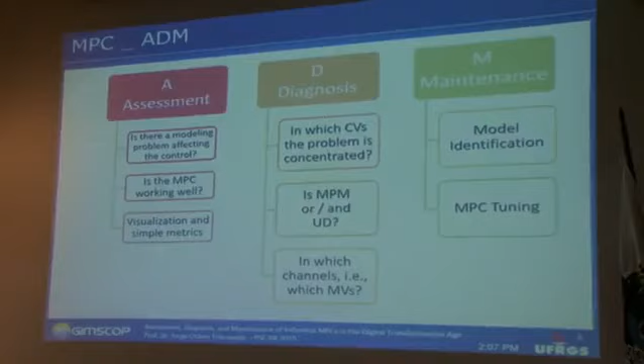Thank you very much, it's a pleasure to be here. What I will share with you is the result of our research. This research started in 2002 in collaboration with Petrobras. At that time, Petrobras started a collaboration with us, with Professor Gemiro, related to assessment, diagnosis, and maintenance. And what we will see in this presentation is how we solved this problem.

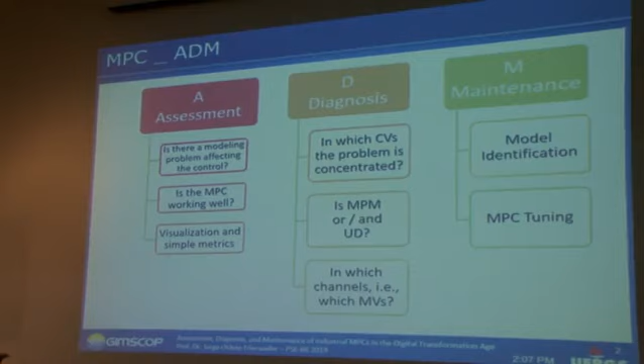It's a very complex problem because we are working with industrial MPC. The first thing we learned is how an industrial MPC differs from the academic world's MPC. That's the first thing we will consider. After that, we'll see how we can account for all these aspects and how we solved it from an industrial perspective, combining the industrial point of view with basic theoretical theorems.

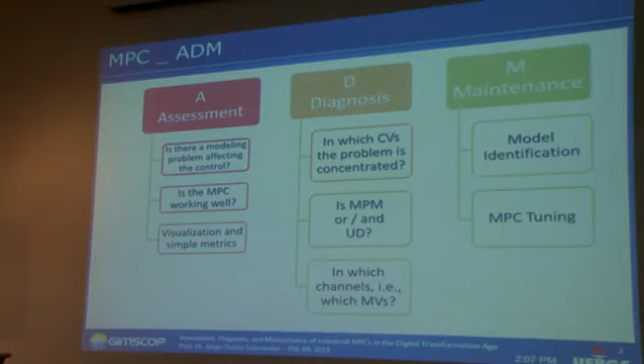Let us start. Here is the overview of my presentation. We can see all the slides, and I will speed up toward the end because I won't have time to cover everything. But I will start with the first thing.

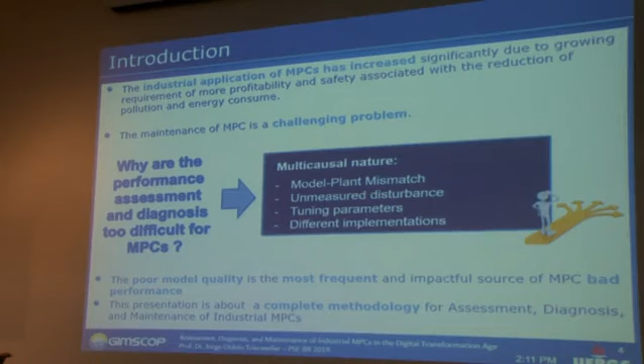The first thing is related to the problem, and it's very important to know that it's a very challenging problem. Why is it so challenging? Because it depends on the model, and all models have model-plant mismatch. We need to quantify this model-plant mismatch and how it affects our results.

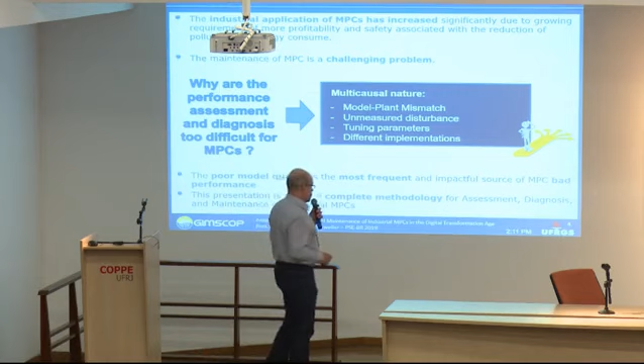Another very important issue related to this topic is that it's common to have unmeasured disturbance - that's another very important issue. And another interesting and important point is tuning parameters, because we have different implementations of industrial MPCs.

For instance, when we think about Petrobras, they have 3 different model predictive controllers. So we are looking for a methodology that is able to work with all these different model predictive controllers and solve the problem without specifying in detail a particular MPC controller.

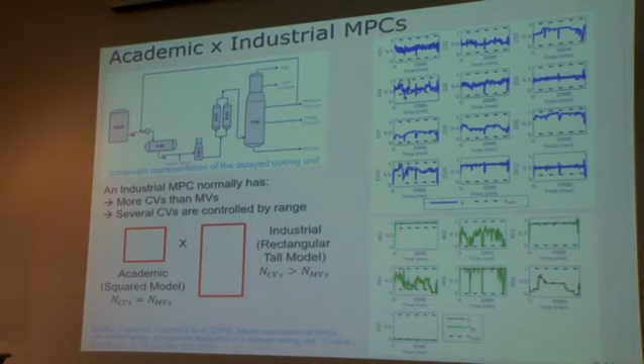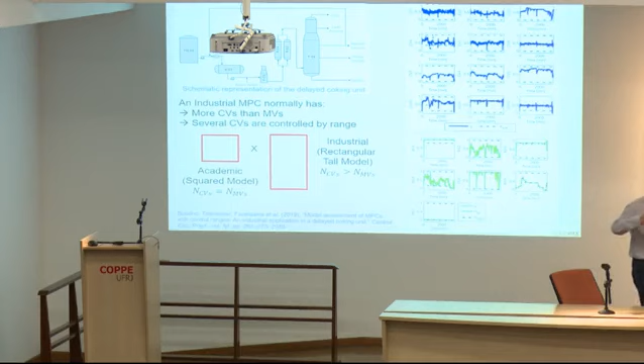But let's go further. The first thing we learned working with Petrobras is that in the academic world, we usually have square systems. In Petrobras and industrial MPC, usually we have more controlled variables than manipulated variables - the system is rectangular. This makes a big difference, because we should not work with set points as in square systems; we need to work with a multivariable system which is time variant.

Usually this time-variant system is quite difficult because we need to consider different scenarios, as we will see. Here we can see the academic world, which is oriented toward set points, in comparison to the industrial world, where we have soft constraints.

And here I introduce you to the first concept. Usually when we work with industrial controllers, we should not just think about set points. Yes, we have set points, but we also have what we call variables controlled by range. In this case, we call it fat points - in fact, we have a large area where the variable can be.

When the variable is inside this range, it's like satisfying a set point. And sometimes this range is small, but it can also be large. This is a quite different point relative to the industrial perspective, and we need to consider how we can handle this.

Another very important issue is that usually when we work with industrial MPCs, we have an economic layer. This economic layer usually changes the set points, the targets, the fat points for the MPC. So we always have a system that is changing the operating conditions and scenarios, meaning which constraints are actually active changes.

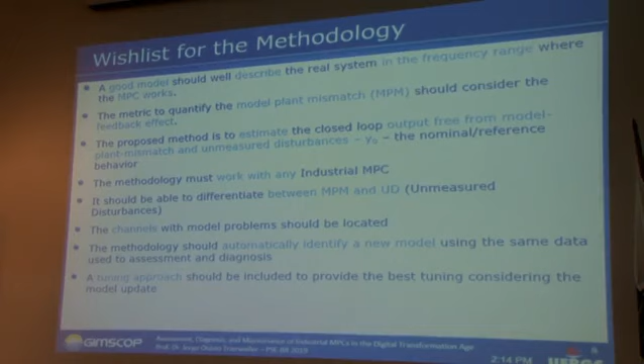Let's go further. Our wish list at the beginning of our research was this: we should have a system or procedure that considers exactly the frequency range where our controller works, and then we should quantify this model-plant mismatch exactly in this feedback, considering this feedback effect. And I will show you that we have done this quite well with our approach.

And then, to capture these two things, we define what we call Y0. Y0 is our reference, our performance reference, and this performance reference can consider this.

And then we need to work with industrial MPCs. As I already mentioned, at Petrobras we have 3 different implementations, and we should work with all of them. And then we need to decide if we are having model plant mismatch or unmeasured disturbance.

After we identify if the problem is related to model or disturbance, we need to show or identify which channel has the problem. Because if you know which channel has a problem, you can identify it, which can considerably reduce the time to maintain and update the model.

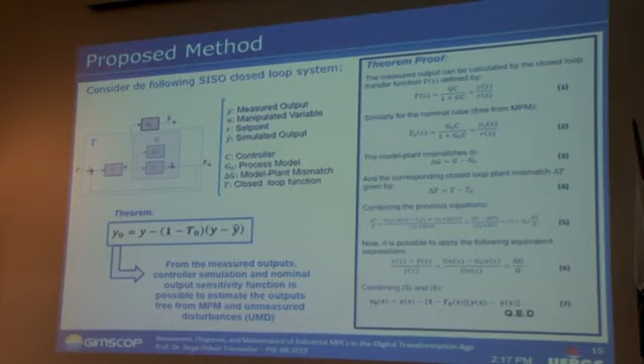And here we can go further and show you what is the base of our methodology. The base of our methodology is this theorem here. And what does this theorem give us? It allows us to calculate Y0.

Y0 is the output in the case where we would not have any kind of model plant mismatch and no disturbance. It is our reference. And for this reference we use the sensitivity of closed loop, and I will show you closely.

For developing this theorem, we consider an uncertainty model, and we have a model of the MPC called G0. Based on G0, we calculate the sensitivity matrix, and based on it, we are able to calculate Y0.

Let us understand better this Y0 and what it means. Here it's easier to understand. We have two models: G0 is the nominal one, and the magenta line corresponds to the real plant.

It's subject to a given input, and when we consider the prediction error of this model, we have this figure here. But the main point is that I can have a big difference between the models, but the models can work quite well in closed loop.

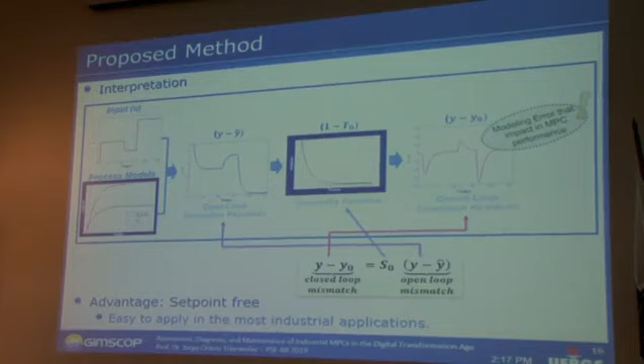One very important issue is that in closed loop, the impact of the error changes, and what changes this impact is the sensitivity function. Here we can analyze this graphic, and this is the main idea of this theorem.

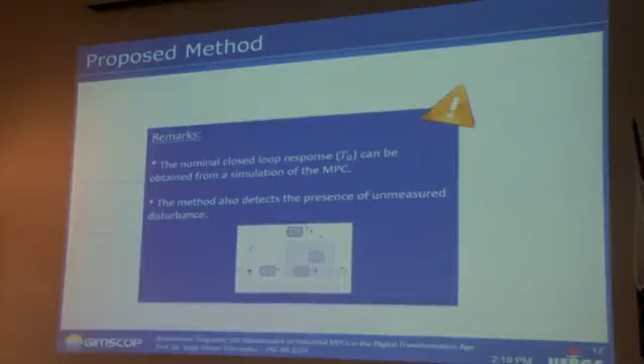Based on it, I will show you that we are able to develop several different points that solve all the problems that I have shown you before.

Another very important point you may ask me about: how can I get this T0, this closed loop response or the sensitivity closed loop response? For that, we use a simulation of the real MPC controller using the model used in the control.

And then we identify, and it's very simple to identify this S0 for each scenario that we can find in a real plant. In other words, we are able to convert any kind of MPC controller, and we can apply this methodology to any kind of predictive controller.

Another very important and related topic is the unmeasured disturbance. The unmeasured disturbance is also captured by this methodology, as we can see later on.

And here we see how we can quantify if the model is okay, if the system is working well, or if it's giving a poor result. A very simple way to do that is using the relative variance index, IVAR.

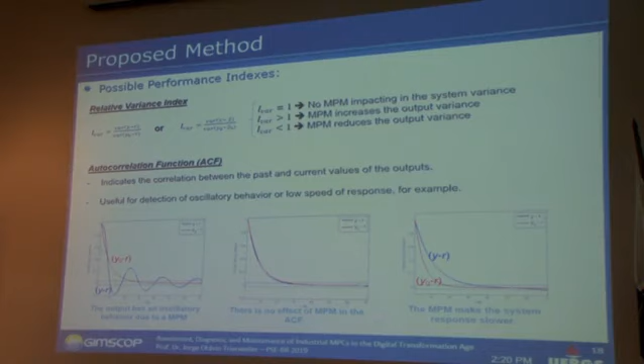The IVAR is the ratio of actual variance to our reference variance. If it's close to 1, it means the system is doing what I expect it should do. If it's higher than 1, it means the model plant mismatch or unmeasured disturbance increases the output variance, meaning we have a problem related to this controller.

And then if we have a value less than 1, it means that we have a model plant mismatch, but in this case, this model plant mismatch can help the system give a better performance than the original one.

Another way to see this kind of result is using the autocorrelation function. And here we can also analyze other behaviors like

oscillatory behaviors and so on. Then we have two approaches to quantify how good the system is related to this topic. It's a very interesting thing because it can apply in different systems with different controllers in different scenarios.

Then let's go further. Here's the main idea of how we calculate this. We start with process data. We need the set points and the measurement values.

And from the MPC controller, we have the control action, which is calculated by the MPC controller. We need to know the nominal model, the model used in MPC. And based on simulation, we can then identify the S0.

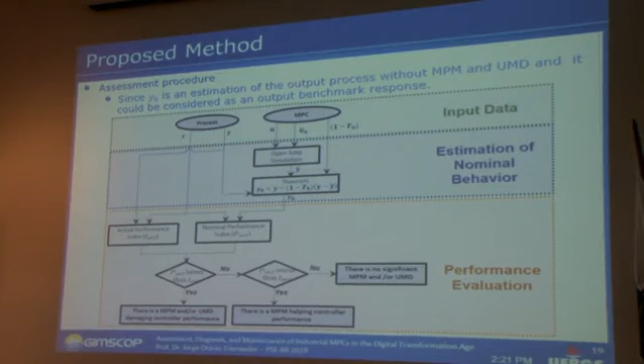For instance, at Petrobras we use BR Lumina to simulate the controllers used in industry. And then we automate this, and obtain the sensitivity or the complementary sensitivity function.

Based on the manipulated variables and the model, we do an open loop simulation, and then based on our theorem, we quantify the Y0, which is our reference. And then we can calculate the I-var and compare the results as I showed you before.

Then it's a simple technology which can work with different controllers. And here I show you in a simple example how it works. Here we have M1, the model used in MPC, the nominal model.

And the real plants are two different real plants. M2 is this one, the green one, and M3 is the red one. And then we have tuned two different controllers. One is faster. The closed loop sensitivity function of this is this one, and the other one is slower.

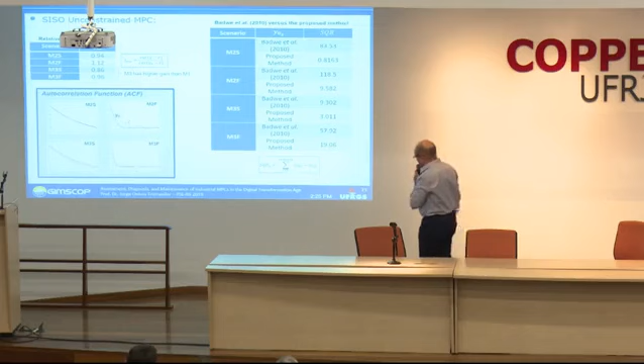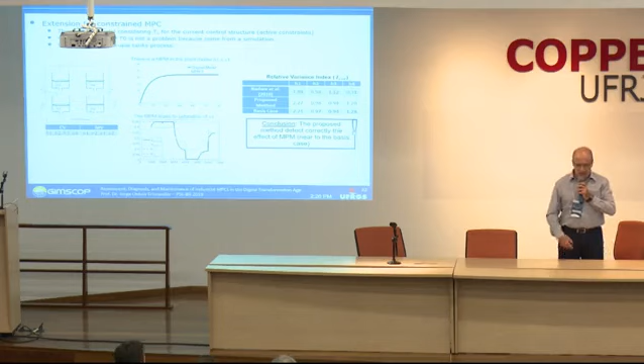Then let us speed up a little our presentation. We have also applied this for a multivariable case, and of course the results are similar, and these results are presented in this paper which we published in 2015.

And then let's go to the other topics that I have mentioned. I know now whether our model or our system is working well or not. If it's not working well, I want to know where the problem is and what kind of problem we have in our system. And then for that, we need to go to other steps.

And then we have here a case. We can see clearly that the result or the performance is very bad. But the problem is we can have a model plant mismatch in one channel. But if we have a system which is strongly interacted with each other, if we have a strong interaction, we

then should consider where is the location. And for that, instead of using a full version, which gives us this kind of results, we use a diagonal one, just the diagonal elements of

sensitivity matrix or the complementary sensitivity matrix. And this gives us which channel has the problem. Where is the problem? The problem in this case is related to this channel. This result is also published, and based on this result, we can then apply

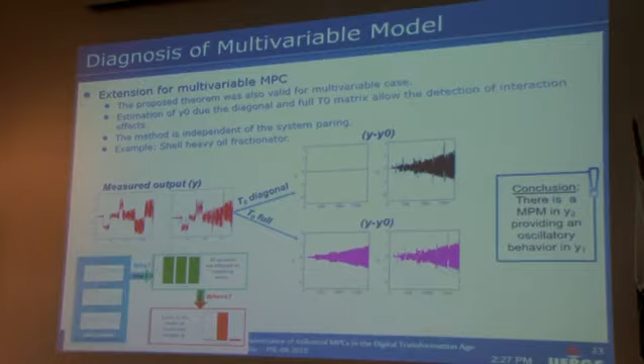I-var for the general system and for the diagonal one. And here we can clearly locate which output is related to the problem, where it's located, which output is strongly affected by model plant mismatch or disturbance. And this was published in 2016.

And now we need to decide if we have a model plant mismatch or unmeasured disturbance. For that, we use some correlations.

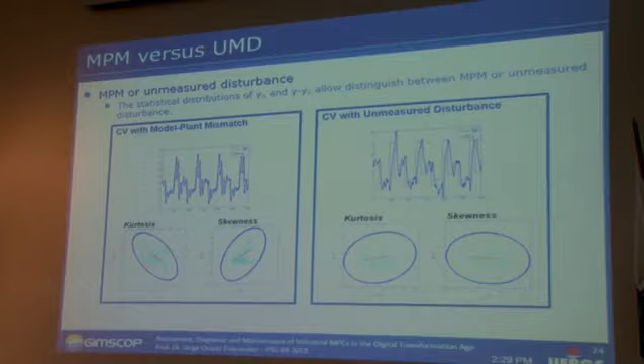Here we have two different systems. One is related to model plant mismatch, and another is working not well because we have unmeasured disturbance. Based on the skewness and kurtosis, we are able to quantify if we have a problem related to disturbance or to model plant mismatch.

If we have model plant mismatch, we have this kind of behavior here, a strong correlation between Y0 and E0. In the case where unmeasured disturbance occurs, we have no correlation like this. This was published in 2016 in this paper here.

Now we need to know which output is more affected by model plant mismatch or unmeasured disturbance. Now we need to know which are the manipulated variables related to it. This is our next step.

Here then, we will develop this kind of index, which is called the normalized model discrepancy index. And for this one, we do the following.

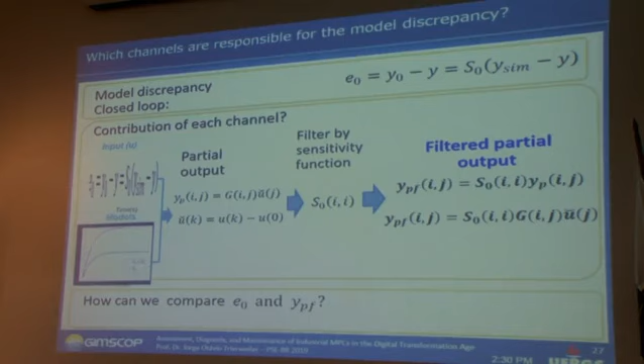Here we have the error, the input, and then the model. Based on this, we calculate the partial output. It means the output which is produced only by one variable each time. And then we filter it using the sensitivity function, giving us a filtered partial output for each manipulated variable.

Now we correlate E0 with this filtered version, and with a cross correlation, we are able to identify which manipulated variable is responsible for the model plant mismatch. Now we know exactly where the model problem is, and if the problem is related to the model.

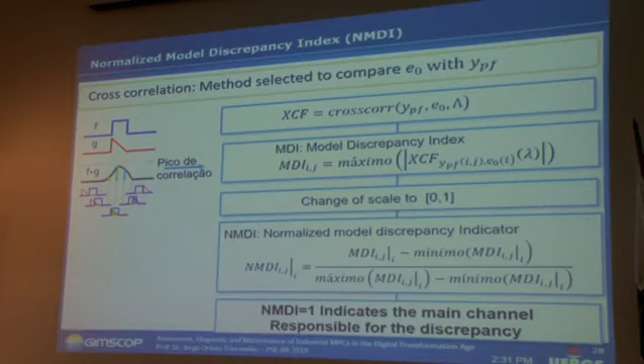The next step is model update. Before we do that, we applied this in a delayed coker unit. This is a real system, a plant in Refap. There we have 12 CVs, 7 MVs, and 2 disturbances.

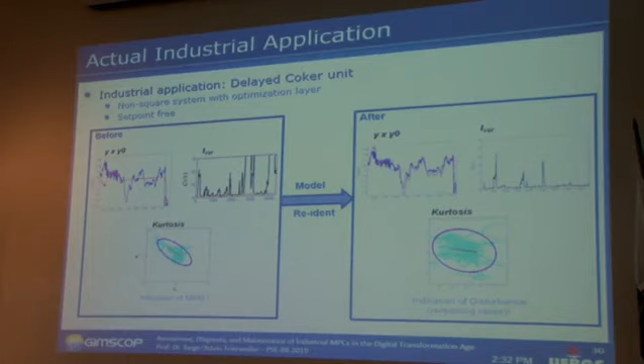Just to summarize, applying this methodology to this system, we found that channel CV11 is where we have a problem related to the model. Based on kurtosis, we see that the problem in this variable is because we have a model problem. And then we identified a new model.

After this identification of the new model, the result we got is this one, and now the problem is only related to unmeasured disturbance. This was applied in a real system and published in 2019, this year, in collaboration with Petrobras.

Now, I don't have too much time, but I will show you very fast how we can do model update. For the model update, we have also developed a new procedure. This procedure uses the same data used by the diagnosis, the same data we use to identify if we have a problem.

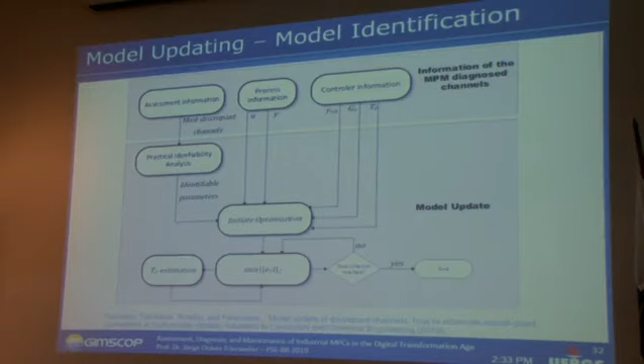In other words, we don't need to additionally perturb the plant. The data that we have is enough. We have a procedure based on it, and here we have developed a new closed loop identification using this approach. This gives us very good results, and it will be published soon.

Finally, after I have a good model, I can then update the tuning. And how can we do tuning on this system?

The tuning is based also on different scenarios, and this is something you can also apply in different types of controllers, not just MPC — you can use it also for a multivariable PID controller or something like that. The first thing is we need to decide which scenarios we want to work with, or need to work with.

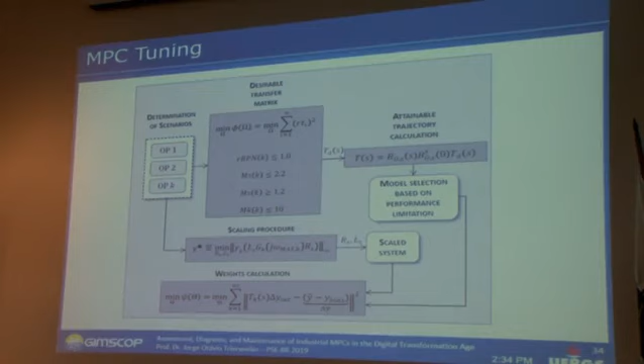Based on an optimization problem, we calculate the attainable performance for all these scenarios. When we know what we can achieve with the closed loop system, the best performance we can achieve, respecting the manipulated variables, robustness, and attainable performance, we have a reference model.

This reference model we can then apply in another optimization problem, where we can tune any kind of industrial MPC. This optimization problem is almost convex, which makes life much easier when we have a real attainable performance.

This last stage is a standard optimization using the desired performance or attainable performance, considering the model predictive controller that we intend to apply in a real plant. This tuning procedure has been published in 2 different papers.

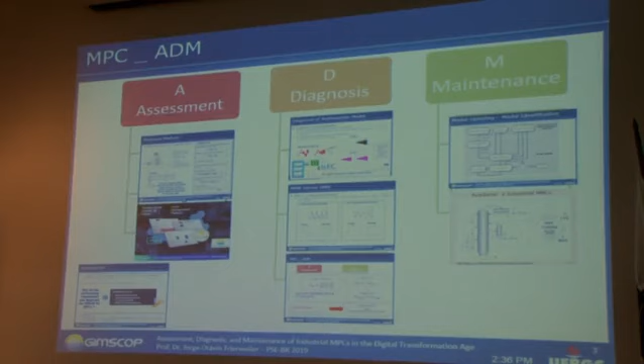Now Franzen is already there and wants me to finish my presentation, so just to complete my presentation, I will show you what we have implemented in a real environment.

This system is called Asset Management Platform, Plataforma de Gestão de Ativos, PGA. It was developed together with Petrobras 3 Solutions and is currently being tested in Petrobras. We already received an award from ANP.

In this system, the idea is to produce or quantify predictive maintenance, flexibility, and other things. Related to the topic we discussed, we have developed a toolkit called MPC-ADM.

The MPC-ADM applies this kind of methodology that I shortly presented to you. We have also developed a nice interface where we can locate and have a previous diagnosis of problems in the system. And then we have also other graphics in this system, and based on it we are able to apply the methodology that we have developed.

To conclude my talk, after a long time, we started more or less in 2002, and we have finally completed our wish list. Now we are prepared to go to the next step.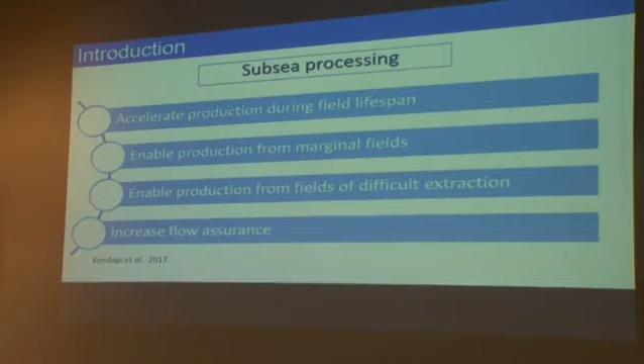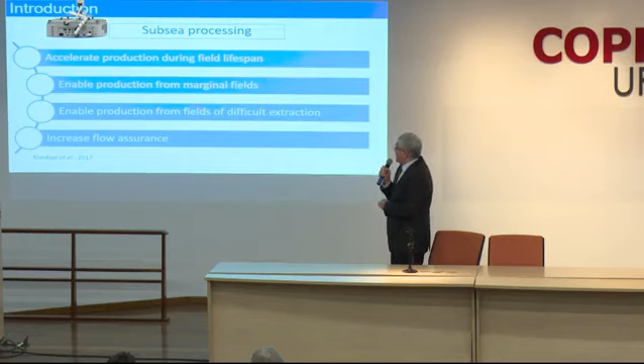This work is about subsea processing. By subsea processing, we refer to treatments applied to fluids at the seabed or below it. The objective is to raise the recovery factor of the reservoir. For example, you can use gas compression, which is the subject of this work, for that purpose. This brings many benefits: you can accelerate production during the field lifespan, apply it to mature brown fields, use it for marginal or smaller fields, fields that are difficult to extract from, and also increase flow assurance.

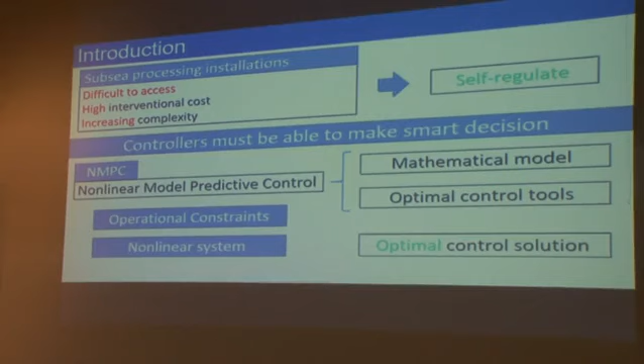However, we have some difficulties related to these processes. For example, they are becoming complex in order to attend to all these benefits, and since they are located under the sea, they are difficult to access and far from the coast. This difficulty in access makes maintenance difficult and very expensive. So it would be nice if these processes were able to self-regulate, and the controllers should be able to make smart decisions.

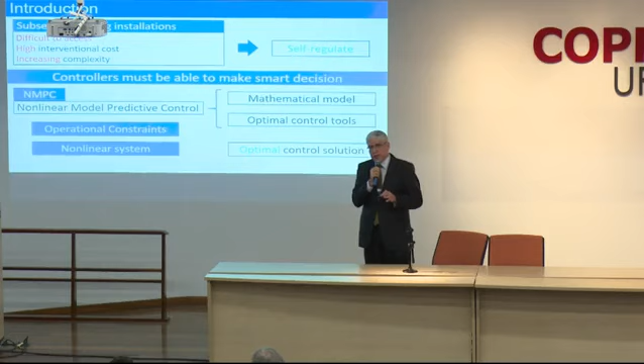We are exploring nonlinear model predictive controllers for controlling these processes. Nonlinear model predictive control, which is very related to the previous presentation's nonlinear version, uses mathematical models that are nonlinear. We will also consider operational constraints and try to find optimal control solutions.

Besides those difficulties that I mentioned, there are some challenges that we have to deal with. Because the environment under the sea is very harsh, the conditions of deep oceans are very difficult to work with. So we have a lot of uncertainties of different kinds.

For example, we have unknown disturbances. The parameters were estimated based on scarce data. We have structural uncertainty due to the fact that we use simplified models. And the sensors may be noisy, or we may have lack of sensors. So we have to proceed with optimization under uncertainty.

We'll treat one specific case. This is a subsea gas compression system named Åsgard. It's in Norway, in the continental shelf of Norway. It was the first subsea compression system implemented about 4 years ago.

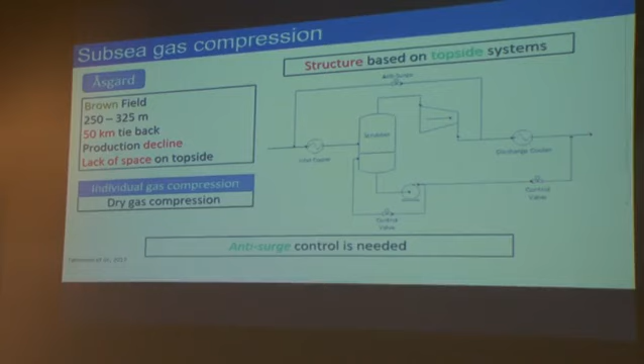And so, for example, they had anti-surge control. You have here the anti-surge valve. So this is the case that we are going to study.

We are concerned with the surge phenomena. We have these typical curves of pressure ratio versus volumetric flow. We have regions where we have surge, which causes instability, even the breakage of the compressor. So we must work away from that zone, but not very far, because the efficiency is higher near there.

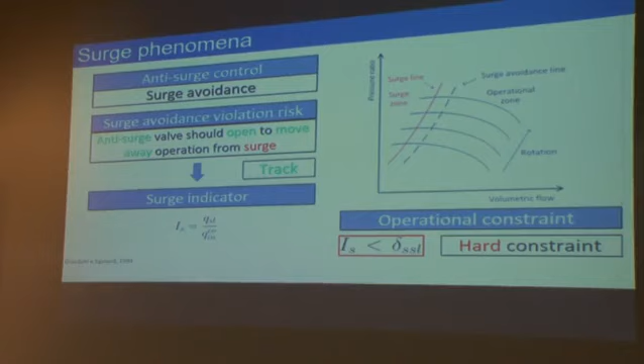So we include a surge avoidance line and an indicator, which is a ratio between the flow in the surge line and at the entrance of the compressor, and we establish a hard constraint for this indicator. So the objective is to study the closed loop for this process of subsea compression, avoiding surge in the presence of uncertainties.

The first thing that we had to do was to develop a model, a phenomenological model. You see here the components. In order to make it easier to identify, we have put in green the equipment where we are manipulating the variables, which are the heat removed and the opening of the valves.

We have 2 trains here, and also the rotation in the compressor. And the dynamic states that we are evaluating are pressure and temperature in the scrubbers and in the header.

That was implemented using IDAS, and we will see that the optimization problem was solved using CasADi.

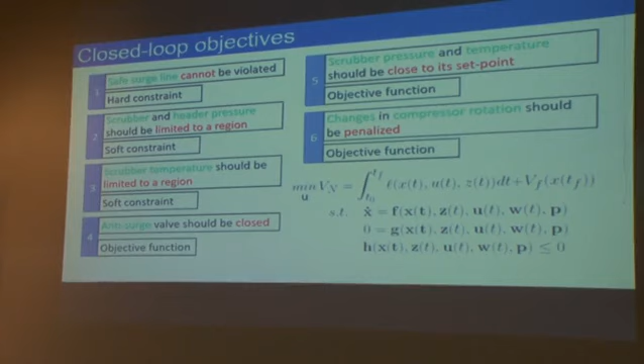So the closed loop objective — we had in fact many objectives that we listed in priority here. The first objective, which was a hard constraint, was to avoid surge. Then we had soft constraints on the scrubber temperature and pressure.

The anti-surge valve should work closed during normal operation. We wanted to follow set points for the scrubber pressure and temperature, and also changes in compressor rotation should be penalized. So this is the objective function here, subjected to the constraints. We developed the terms of this finite cost function so that all these considerations would be taken into account.

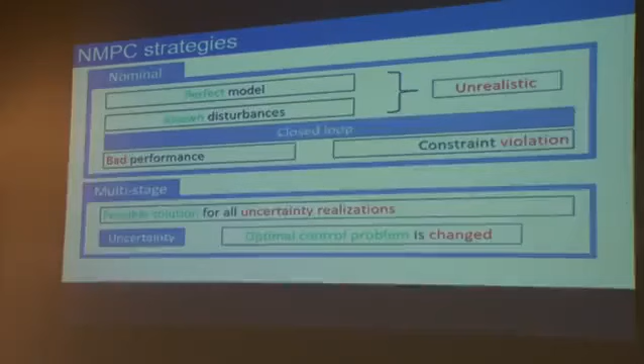But we had also two other conditions here. We could use a nominal approach in which the model of the process would be known along with the disturbances, but that would be very unrealistic. And if we closed the loop in the presence of uncertainties, there would be problems like constraint violation or bad performance. So we used a robust approach, named multi-stage approach, in which we calculated a feasible solution for all realizations of the uncertainties, considering that explicitly in the solution of the problem.

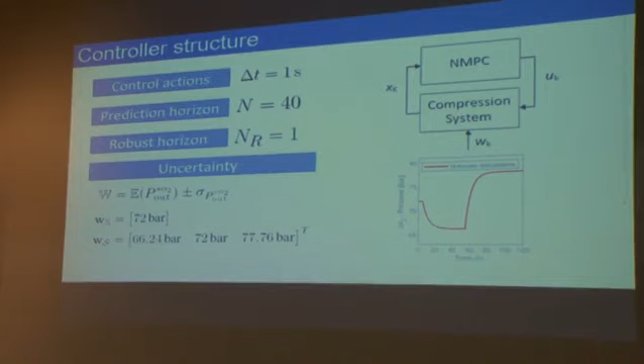It was to simplify things. For the uncertainty, we considered that the pressure at the input of the second train could vary between these 3 values, with an expected value and a standard deviation. So the multi-stage model considered these 3 realizations, and then we made a simulation in which the disturbance variable varied like this.

I will only show some results here because, due to time constraints, I had to select some of them. I will not show the first trial and other tests we made, like set point tracking. I will only show the results for that disturbance.

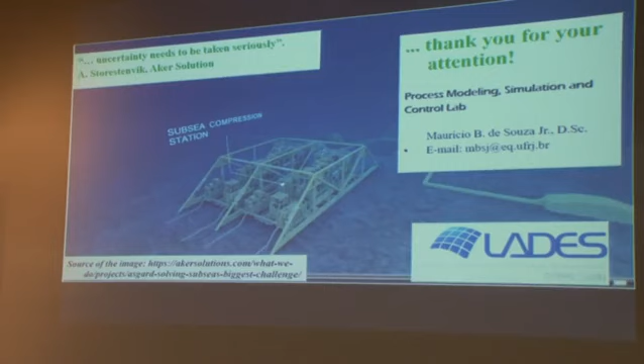So the final message is this phrase I chose from Aker Solution. Aker Solution was the company that helped Equinor install this equipment. An engineer there said uncertainty needs to be taken seriously in every project for the process to be operated safely. That's the main message I would also like to pass on.

Here you have my address, and thank you for your attention.

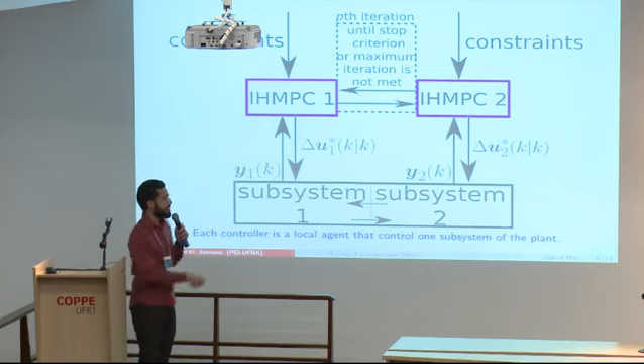Talking about the cooperative distributed controller, we have a certain number of agents, represented here as infinite horizon model predictive controllers, controlling some subsystems of a major system. They are presented with the same color because they share the same objective function. The difference between them is actually the decision variables. Each one has a certain subset of decision variables, which reduces the size of the problem each one is solving, making them faster than possibly a centralized controller. However, they exchange information with a distributed suboptimal optimization algorithm that can be terminated at any iteration time.

So the formulation of each agent in this controller, in this proposition, is actually an infinite horizon model predictive controller with terminal constraints, which are not here represented because they were already substituted directly into the optimization problem.

Then the main idea is that each output variable should track what we call the artificial state, and this artificial state is actually the set point that it might be tracking.

The advantage of this strategy is that by not posing hard constraints, these controllers always find a solution at any time step. So this is an advantage, and the feature is feasibility. Given any solution, it remains feasible at successive time steps.

It converges to the centralized solution if enough time is given for the suboptimal algorithm. And optimality: if this algorithm is terminated at a certain iteration, let's say P, it will converge to a Pareto optimum. And the stability of the formulation, that the closed loop remains stable, means that the cost function of each agent is a Lyapunov function in the nominal case.

But optimality and stability depend on defining minimal values for the elements of the suppression matrix. If this property is satisfied, the controllers are stable.

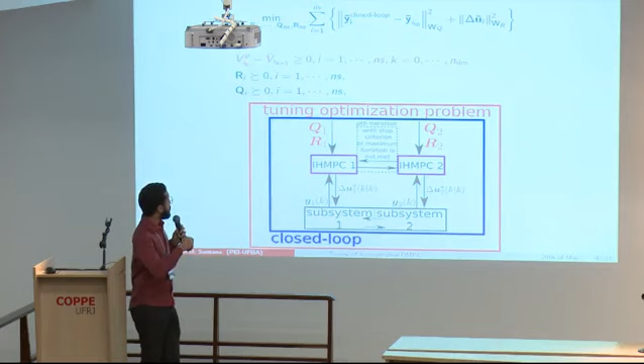So we define a tuning algorithm to track the difference between the closed loop simulation and the set point, penalizing variations of the input variables, and it needs to satisfy this restriction, this stability constraint that we imposed.

So, in offline systems, we simulate a closed loop with a certain matrix given by the auto-tuning optimization algorithm. This will find the best trade-off between performance and stability.

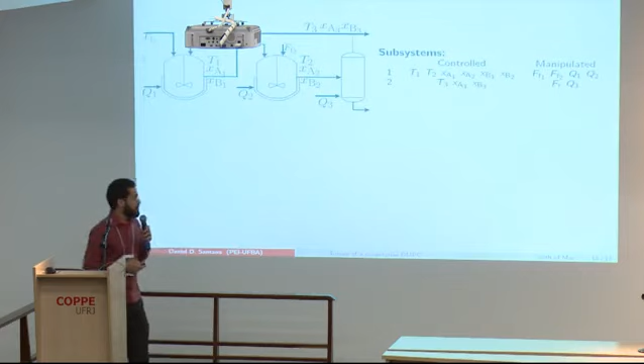Then, to highlight the features of these controllers, we used two CSTRs in series with a flash tank with a recycle stream that was used back in 2010 by Stewart.

We choose two subsystems to work with: the CSTR reactors and the flash tank. And to impose a harsh scenario for the controllers, we set the control horizon of both controllers to one, to reduce the amount of information exchange between the controllers, and the maximum iterations of the distributed optimization to one, to be very fast to solve as well.

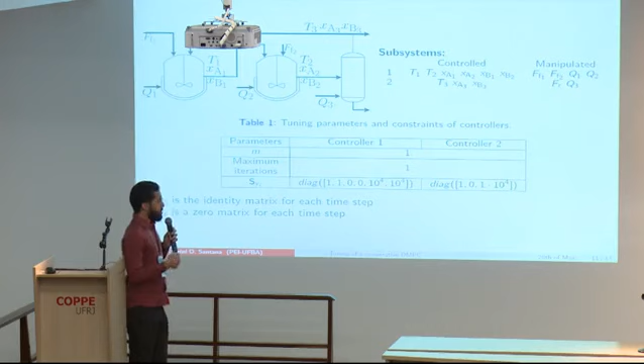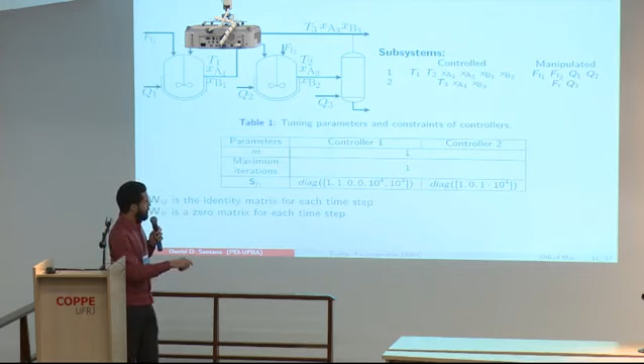Since we are using a tracking problem, not a zoning approach, and this problem is not square, we set the composition of the reactant A to be in open loop for this example, and we want to control the composition of the product B. That's why we set this matrix as high as possible, and we also want to track the temperature, but with lower weight.

So these are the results. The values found were not impeditive for the application.

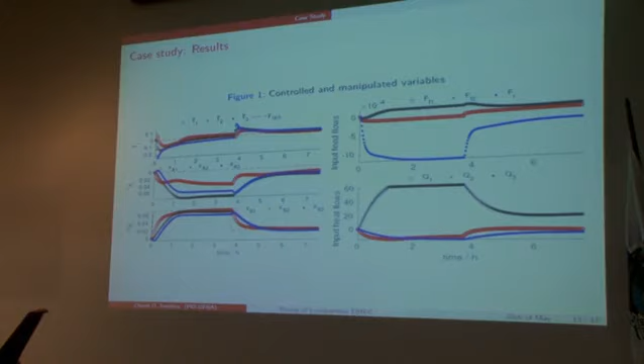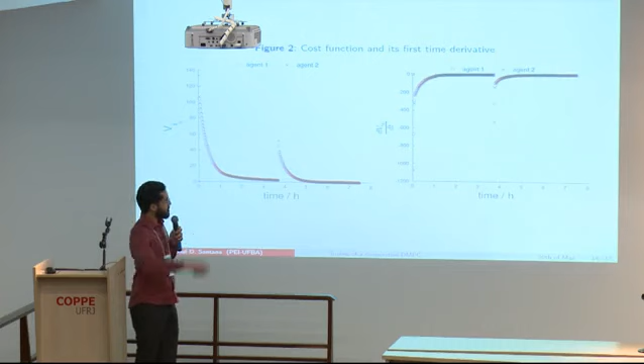Let's compare it here. Here we have the composition of the product tracking the set point, the temperature tracking the set point, and the cost functions of both agents acting as a Lyapunov function, monotonically decreasing. Here we have the absolute values and the first time derivative of this function to prove that it does not increase. The only increase you find here is on the change of the set point.

So, some concluding remarks. We propose a tuning algorithm that can calculate the trade-off between stability and performance for this approach, and we successfully applied it in a simulated scenario using a system provided in the literature.

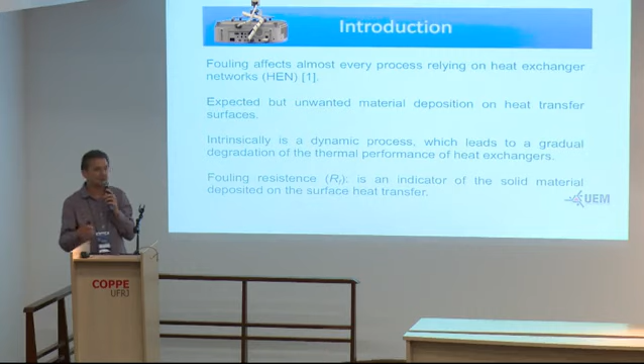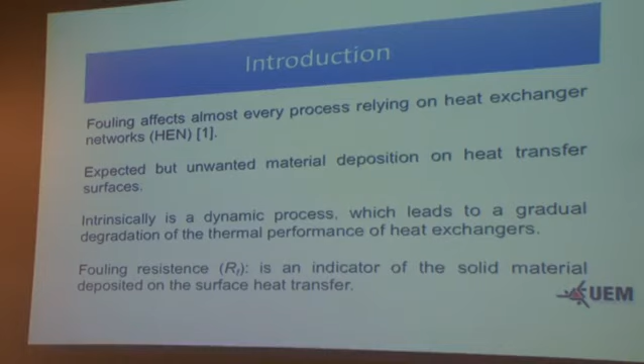Some authors use the term fouling resistance, but originally the first works treated the problem as a fouling factor, a number that is an indicator of the amount of solid material deposited on the heat transfer surface. But we know that it's not the correct way to treat the problem, because the first model was proposed in 1959 by Kern and Seaton, and they considered the mechanism as a difference between the deposition and the removal of material during the time.

So we have a fluid flowing inside a tube, for example, and we have a deposit layer on the surface area. This proposition was the first one, and maybe that first work was not able to predict effectively how it works, and of course it has some problems.

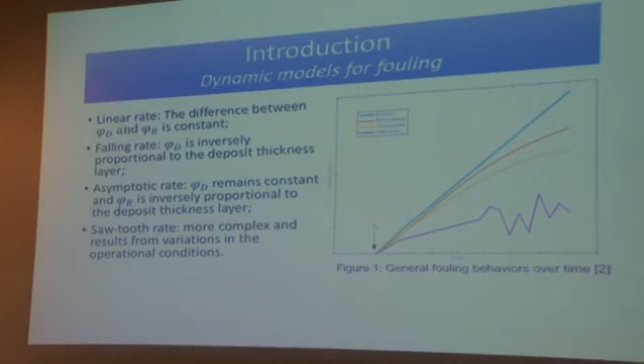But it is possible to consider 4 different fouling behaviors over time. The first one is a linear rate, where the difference between phi d and phi r is constant. The second one is a descendant or falling rate, where phi d is inversely proportional to the deposit thickness layer. We have an asymptotic rate, where phi d remains constant and phi r is inversely proportional to the deposit thickness layer. And we have the most complicated case, known as the sawtooth rate, which depends on the variation in operational conditions in the heat exchangers.

But the problem is that this model obviously has some deficiencies. One of them is that it does not include chemical reactions and some mass transfer processes in the basic fouling process.

It's known that the most common fouling mechanisms are crystallization, particulate, biological, corrosion, and chemical reaction fouling. This original method doesn't consider these features.

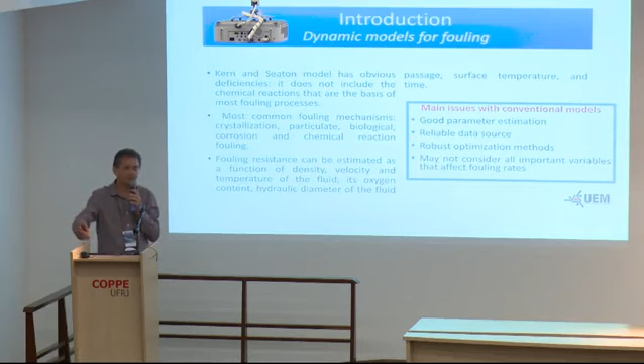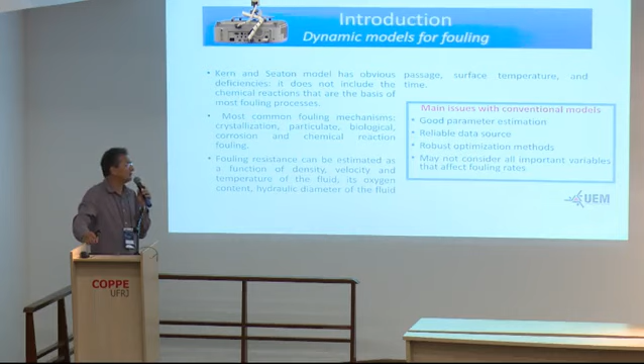We know that the fouling resistance can be estimated as a function of physical properties: density, velocity, temperature of the fluid, its oxygen content, the hydraulic diameter where the fluid is flowing, the surface temperature, and the time of use of the equipment. So the main issues with conventional models to predict fouling behavior are that we need a good parameter estimation, reliable data source, robust optimization methods, and we may or may not consider important variables that affect fouling.

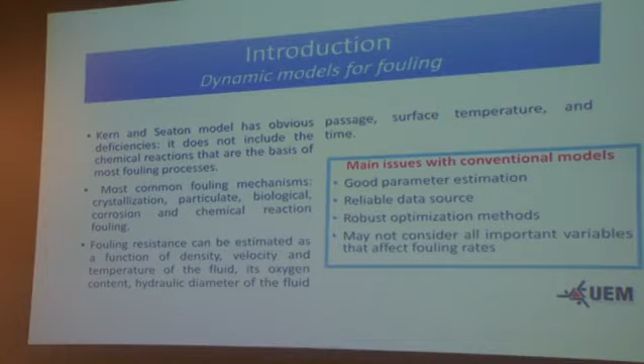In this project, we intended to predict the fouling behavior by using artificial neural networks, which are intelligent paradigms that try to model a phenomenon by simulating the learning process of us human beings.

If we have an artificial neural network well trained with an adequate number of data and a suitable learning algorithm, it's possible to provide acceptable results for relating dependent and independent variables, even for nonlinear and very complex process systems.

The main advantages of artificial neural networks are that they can learn by examples, they are simple and powerful models, and there exist well-developed algorithms for training them. The idea is to use a structure for this artificial neural network with 2 layers, a hidden layer and an output layer, with the inputs.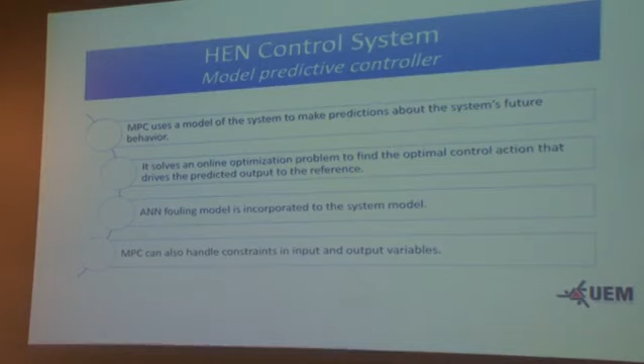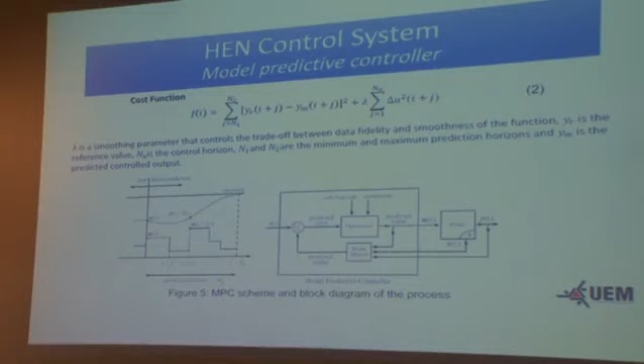Here is the cost function. We have the schema of the MPC and a block diagram of the process, along with a flow chart of the MPC and the artificial neural network fouling rate model.

We have the fouling data, the training of the artificial neural network to predict the fouling resistance. We update the heat exchanger network model considering this fouling resistance, and we apply MPC control to control the outlet temperature by adjusting a flow rate, minimizing the utilities requirement.

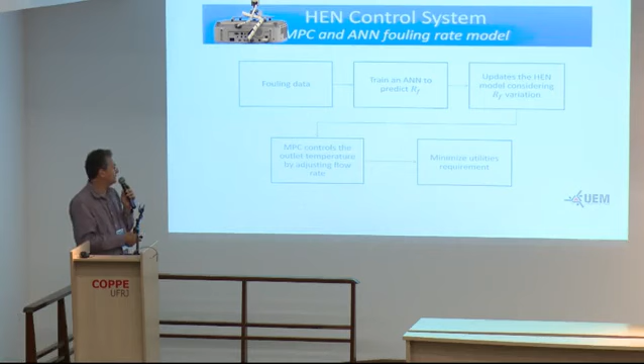Our case study has a heat exchanger network with 4 devices, one cold stream and 2 hot streams. Our main objective is to control the temperature of the H1 stream.

By manipulating the flow rate of the C1 stream, we have as manipulated variable the C1 flow rate and as controlled variable the H1 outlet temperature.

We use a lumped model for each heat exchanger, because if we used a distributed model we would have a partial differential equation system. This is the manner we used to solve the problem originally, but we will try to improve this in the future.

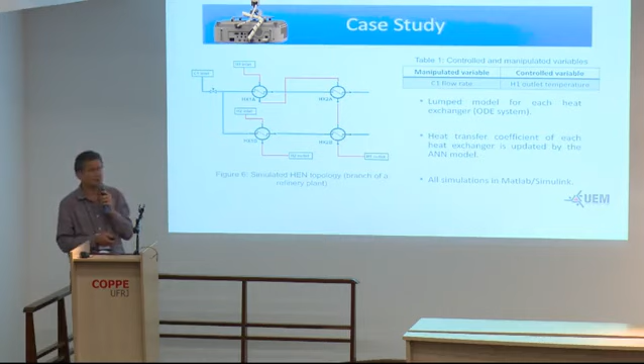The heat transfer coefficient of each heat exchanger is updated by the artificial neural network model, and our simulations were performed in MATLAB.

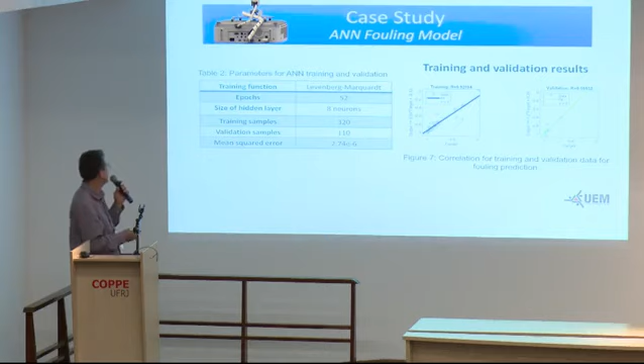We used the Levenberg-Marquardt algorithm, with a mean squared error very small. As a result, we tested 4 different situations: 6 months, 12 months, 18 months, and 24 months.

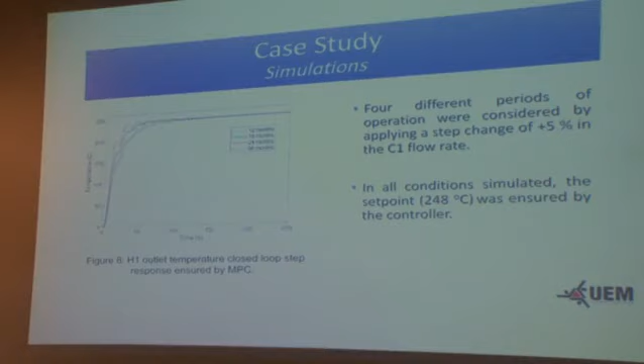We applied a step change of 5% in the flow rate of C1. In our simulated conditions, the set point considered was 248 degrees Celsius. This is the behavior of the closed loop.

As conclusions and future work, we would like to say that artificial neural network models can be an efficient tool to predict fouling rates, considering several input variables that affect directly the fouling resistance. The combination of the artificial neural network fouling model with the MPC for the heat exchanger network control can lead to energy savings by minimization of the usage of utilities.

Simulations that consider different disturbances need to be performed, and a bigger set of fouling data would be necessary to extend the range of operation in which the artificial neural network would be valid. Networks with more complex dynamics would also be interesting to simulate with more heat exchangers, with different kinds of heat exchangers, not only shell and tube heat exchangers, but others.

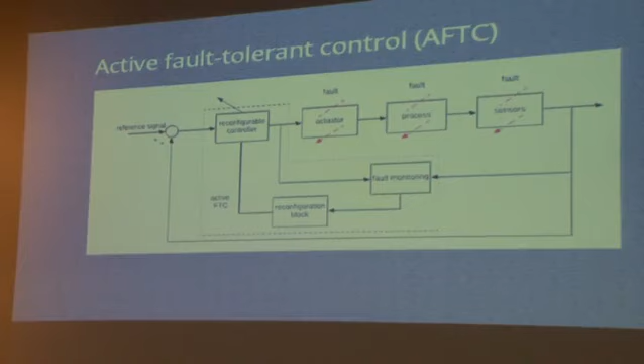Bom, então, um pouco da metodologia. Aqui eu trouxe a estrutura básica do controle tolerante a falhas, onde ele faz a reconfiguração do controlador em tempo real, diferente do controle tolerante passivo, que tem as dinâmicas de falha já embutidas no sistema, na concepção do controlador.

Esse aí faz a reconfiguração em tempo real, que pode ser através do monitoramento da planta e pode ser feito também em referência a um modelo da planta no estado nominal. Então, calculando ali o desvio, ele pode alterar a lei de controle para adequar aos objetivos do controle que você está fazendo da planta.

Ele realoca esse sinal para os atuadores remanescentes. Caso você não tenha uma redundância física no seu sistema, os outros atuadores vão ter que dar conta dessa falha que ocorreu. Então, ele realoca, considera os limites dos atuadores remanescentes, e o controle das variáveis passa a ser feito naquelas faixas, como foi demonstrado na apresentação anterior, do professor Jorge.

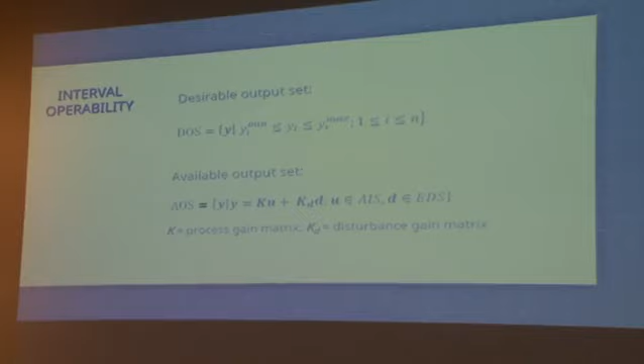O intervalo de saídas desejável, que seriam as limitações que você quer impor às saídas controladas com relação ao seu objetivo de controle. E aí, por fim, o intervalo de saídas disponíveis, que considera os 2 intervalos, o de entradas disponíveis e o de perturbações esperadas, para calcular as saídas disponíveis para o sistema.

Isso aí é feito para o processo em malha aberta, sem implementação do controle, considerando as matrizes de ganhos associadas ao estado estacionário do sistema.

Bom, aqui os resultados. A gente pegou um sistema de 2 CSTRs, que é um sistema bastante recorrente na literatura, como foi mostrado também na apresentação anterior a essa. E aí a gente quer fazer o controle das temperaturas dos tanques usando a vazão de resfriamento nas 2 jaquetas.

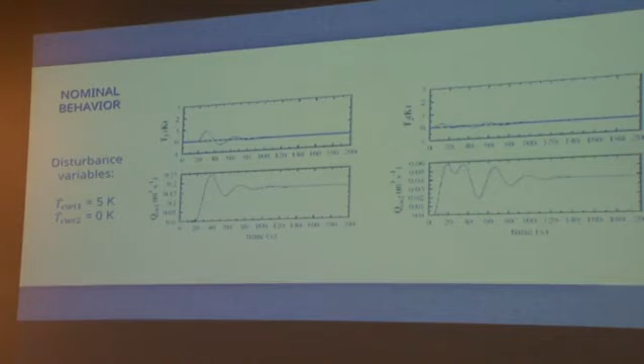Aqui é para o processo em falha, você vê em azul a resposta do sistema. Aqui o atuador travado - uma coisa que esqueci de mencionar, a falha considera travamento no estado estacionário, que é o tipo de falha que a gente considera. Então, com QCW travado no estado estacionário, o controle nominal não consegue trazer de volta para o set point a temperatura do tanque 1.

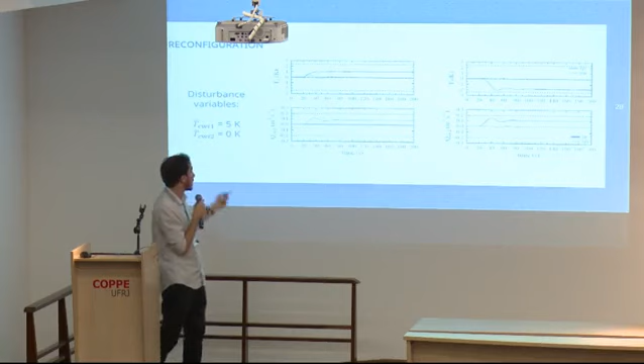E aqui a aplicação da reconfiguração. Ali estão as restrições que determinamos, tanto para o tanque 1 quanto para o tanque 2. E aqui uma representação da dinâmica do processo, num plano de fases de T1 e T2, para onde ela foi dentro do intervalo que consideramos de máximas restrições aplicáveis.

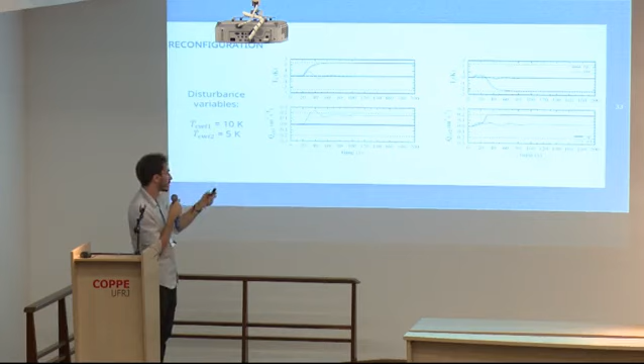Aqui para o segundo caso, o comportamento nominal com a falha, agora num valor limite da perturbação de 10 para a temperatura da água do tanque 1, da jaqueta de resfriamento. Aqui é para onde ela é levada, para fora do intervalo onde estipulamos. E aí a aplicação da reconfiguração: você vê que ela atinge o limite mesmo da entrada, o valor limite, para poder trazer o sistema para o ponto de restrições máximas.

Bom, as conclusões do meu trabalho: como é um estudo inicial, está cheio de considerações e restrições, mas os resultados que obtivemos indicam que a aplicação da análise de operabilidade é viável, pode ser aplicada na determinação dessas restrições, com base no que vimos. Mas isso foi para as considerações que fizemos no estudo.

Então, como trabalho futuro, temos interesse em desenvolver essa técnica para aplicação industrial mesmo, em problemas industriais reais. Para isso precisamos estender a metodologia para sistemas de dimensionalidade maior, além dessas duas dimensões que apresentei, e considerar outros tipos de falhas em atuadores que não seja só o travamento, ainda mais no estado estacionário, e comportamentos diferentes das perturbações. E aqui os agradecimentos. É isso, obrigado.

Many thanks, Pedro. Questions? No questions? All right. Thank you. We'll finish the session.